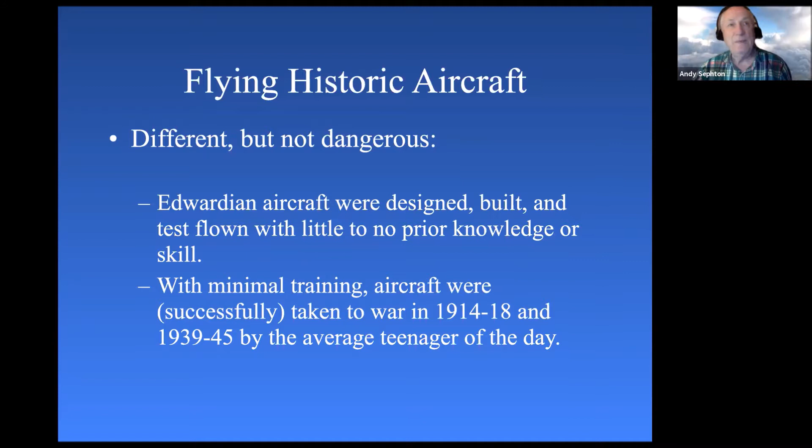With minimal training, aircraft was successfully taken to war by teenagers. And we've read the book, so we know that. So they can't be difficult, but they are sufficiently different from modern airplanes, not high risk, but you've got to unteach modern techniques and teach the old stuff. And that's really what my job at Shuttleworth was, making sure we'd got a set of pilots that could safely fly and demonstrate the airplanes.

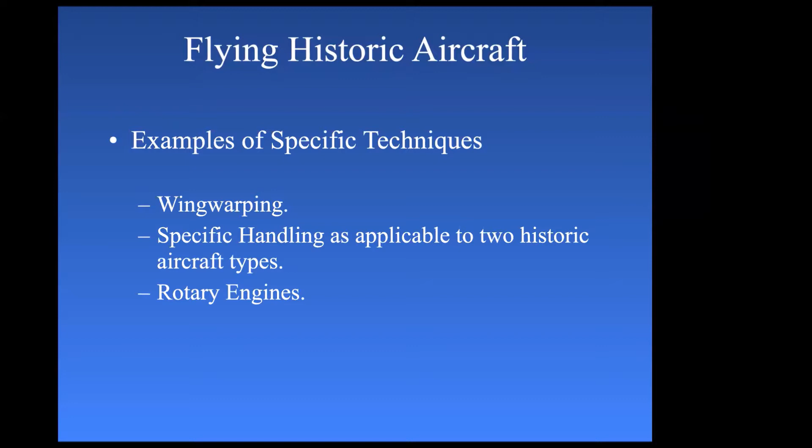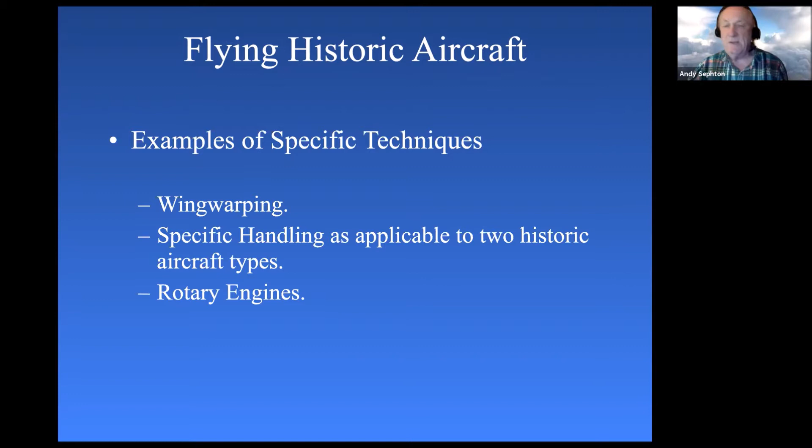So what I'm going to do today is look at examples of specific flying techniques that are applicable to some of the Shuttleworth airplanes. I won't go through every airplane because it would take too long, but we'll look at four particular handling types that are perhaps different to what the normal LAA pilot would be used to.

So wing warping, that was the description of it that I got from my predecessor as chief pilot at Shuttleworth: it'll never replace the aileron. Reason being that you get an awful lot of adverse yaw, and we can look at it with the Blériot 11. That's the Blériot 11.

Lost my headset because I trod on the cord. Let me just put that to the back of my computer.

Right, that's the Blériot 11. It's the oldest flying aeroplane in the world. Old Rhinebeck in the States thought they had the oldest one, but our construction number was slightly lower than theirs, so they've admitted that this is the oldest one.

It's a little bit like the Trigger's broom, though, in that it's had 5 new handles and 6 new heads, but it's the same old broom as it always was. The engine, I think, is still original, but a lot of the other stuff has been, shall we say, changed over the years. But it's still got the same construction number.

Now, looking at the flying of the airplane, the yaw is controlled by rudder bar, rudder at the back. The elevation is controlled by an elevator. And again, you've got elevators at the back of the airplane. But the roll control, as you would understand it, is done by wing warping. What happens when you wing warp? Let's see what the next slide is.

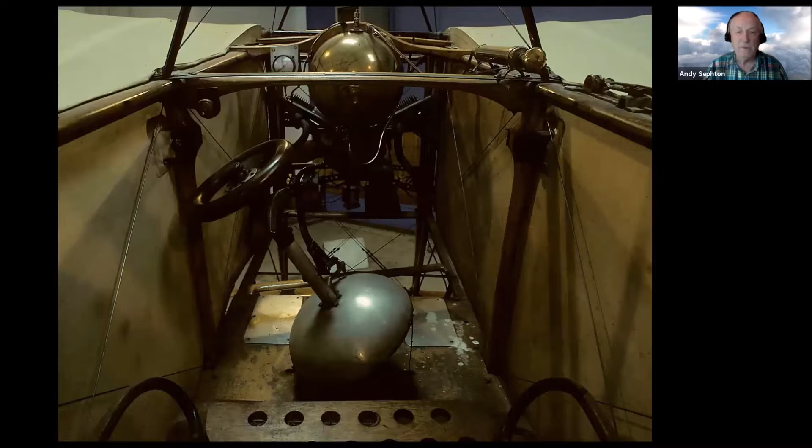That's the cockpit, and you've got a control column in the middle. At the bottom, that bell-shaped thing is called la cloche, which is French for bell, spookily enough. There's a bell crank under that with wires leading to the elevators and, correction, the wing warping. And there's a rudder bar just in front of the cloche that you can see. So it's conventional flying controls.

To operate the airplane, we might as well have a word on that now. The only gauge that you can see is to the left of the tank at the front, which is an oil pressure gauge. The oil pressure is pilot controlled, and you control it by pumping up the pressure in the oil tank, which is that pump on the right hand side of the cockpit. And on the top of the oil tank, that copper thing in the front of the airplane is a valve to blow off air, and at the bottom is another valve to allow oil to flow to the engine.

On the control column, there's a lever to the right of the control column, which is the advance and retard. Fully forward to go slow and fully back to go fast, which is opposite to the way you would normally expect it. And in fact, the French, up until World War II, all of their throttles operated in the reverse sense. You pulled it back to go faster and you pushed it forward to go slow. And the Hurricanes that we sent to France at the beginning of World War II were modified so that their throttles operated in the opposite direction.

Sometime during World War II, the French came into line with everybody else and have their throttles operating conventionally. And that is the only example I can ever find. And I lived in France for a year doing the French test pilot course. The only example I could find of the French coming into line with the rest of the world. So store that one away.

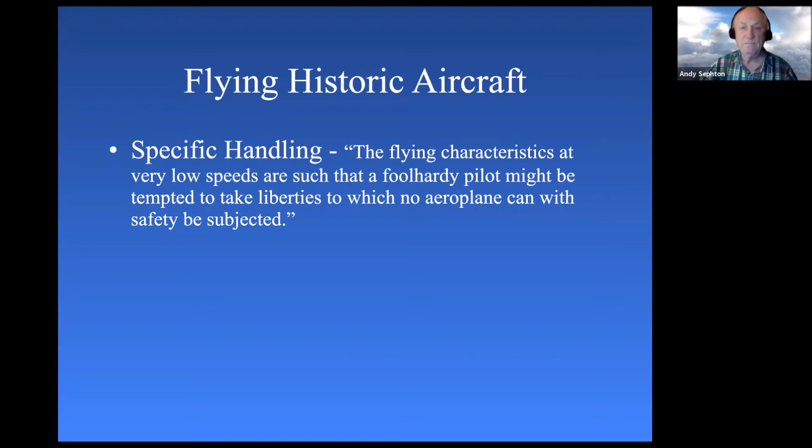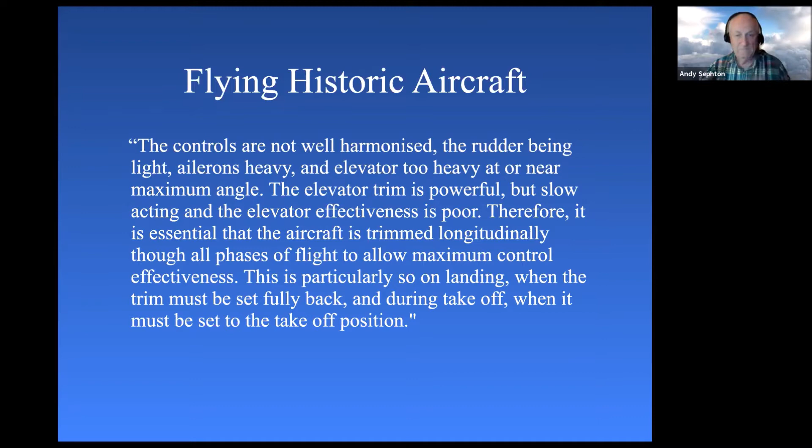Oh, yeah. I guess it's the Lysander because of the elevator trim. I was going to ask that at the end. I'm sorry. That's all right. But you're absolutely right. It is the Lysander.

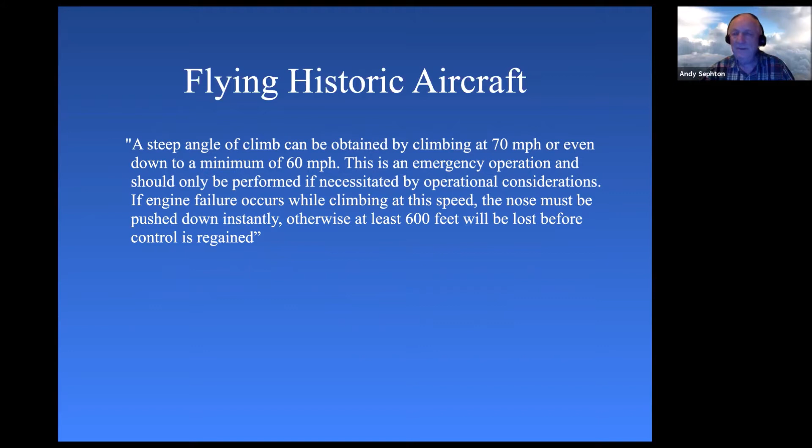Are we done? Yep, good. Thank you. And there we go, Westland Lysander. So why is it like that? The Lysander is one of my favorite airplanes. Second favorite, it's not first favorite, obviously.

It's a remarkable airplane. I gave this talk to Westlands 20 years ago now, and I said the Lysander is a remarkable airplane. Some of it's remarkably good, some of it's remarkably bad, but there's very little in between. And I got a very funny look from the chap at the back, who was one of the design team from 1930 on the airplane. So you've got to know your audience, really.

Let's look at the bad things. Really, it's the handling characteristics. The handling characteristics are not dangerous and they're not bad, but they are quite a trick, and I'll talk about that in a minute.

But the good stuff: if you look at the pilot's eyes, they're level with the wing, so you've got a good field of view. It's not cockpit visibility, it's cockpit field of view. Visibility is the distance you can see. Field of view is what you can see. So there's a good field of view in the Lysander. You're on the wing chord line in effect, so you can see above or below the wing. So you've got a good field of view to the rear.

The pilot sits quite high, so you can see over the nose. It's one of the few tail draggers that you don't have to weave, because you can see in front of the airplane. And because it's a relatively narrow cockpit, you can see either side as well. So very good field of view from the cockpit. What else is good?

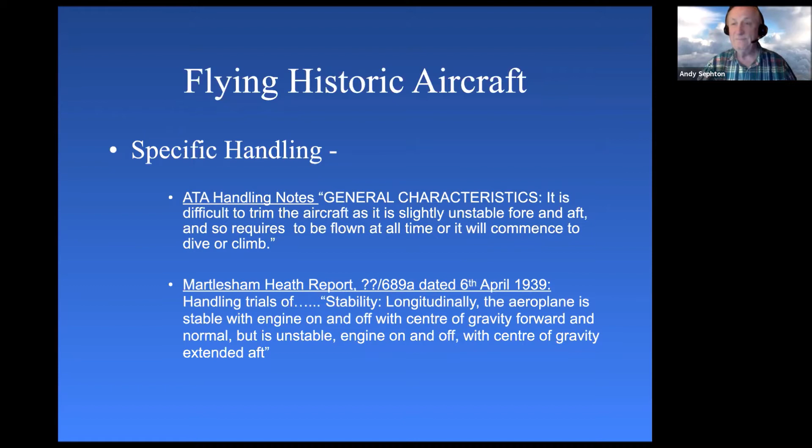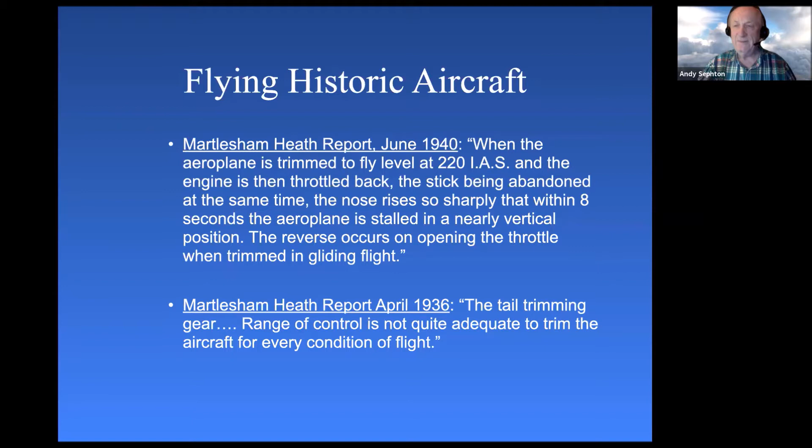All red? There's a few more. Any ideas what it is yet? Now, this is what the pilot's notes say. Having read all those Martlesham Heath experimental reports, this is what the pilot's notes say, and it is an absolute lie. It's not. It's the Hurricane Mark 1. Not my favorite airplane for various reasons, but it is unstable in pitch.

We thought we'd got something wrong with the airplane. In fact, I did the first flight of the Shuttleworth Sea Hurricane in 1995, and it was grossly unstable in pitch. We'd screwed up the center of gravity, and it was about 100% behind the aft limit. But even when we got it within the correct limits, it's still unstable in pitch, and we were trying to find out why. This was the only Hurricane 1 on the circuit at the time.

And I was working for Rolls-Royce, went to a dinner with Bill Pegg, who was the Brabazon test pilot, and asked him. I said, have you got any experience of Hurricanes and Spitfires? And he said, yes. What about testing? Yes, he had. So I said, well, what about Hurricane stability? And he looked down his nose at me and he said, everybody knows that the Spitfire gets its maneuverability from aerodynamics. The Hurricane gets it from instability, which was true. So it is an aircraft that's unstable in pitch.

So why is it unstable? Tailplane's too small. CG's too far aft. The tailplane actually is very small. The wing section on the Hurricane is the Clark YH, which has got quite a strong pitching moment. With the small tailplane, it is unstable in pitch, and even more so if you put a bit of yaw on, you blank one side of the tailplane, and you end up with quite violent pitch down.

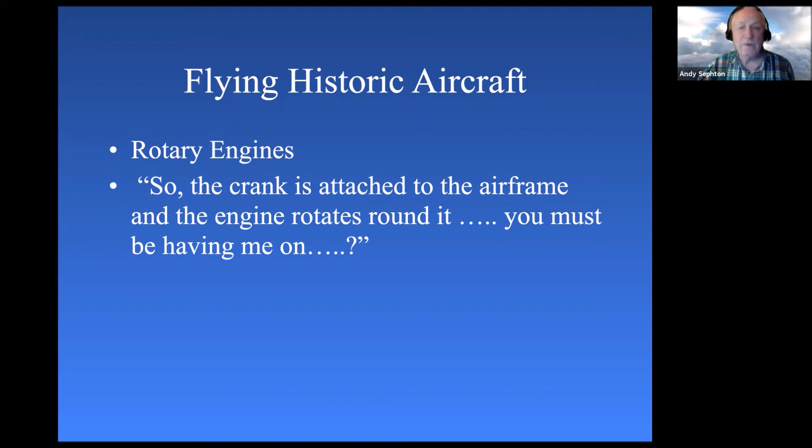Right, I'm going to go now on to rotaries, which is one of my favourite areas. We'll do this for about 20 minutes, then we'll go on to questions. So the rotary engined aircraft, as far as the pilot is concerned, is the Shuttleworth Collection Sopwith Pup. I'll tell you a little story about this.

I was in the Air Force. I was on 54 Squadron from 1975 through 1978. We were flying Jaguars. We had our 60th anniversary in 1976. We had obviously a weekend of celebrations.

The original squadron boss, a Major KK Horn, and his adjutant Captain Charlie came to our 60th anniversary celebrations. They formed the squadron in France on Sopwith Pups in 1916. We also had a lot of the First World War ground crew there as well. A lot of Second World War people too.

Bill Hooper, who was the creator of Pilot Officer Prune, was a member of 54 Squadron. Pollock, the guy that flew the Hunter under Tower Bridge, was a member of 54 as well, so we got to meet him. But going back to KK Horn, Captain Charlie was a little guy. He was about 95 at the time when we met him, and probably about 5'2", 5'3", a little chap with a shock of white hair, a bit like mine. Well, if you could see mine, you'd see it was white.

And he gave the speech after dinner. He gave three anecdotes, and unfortunately I can only remember one of them. He said, and I quote, "In retrospect, it was probably a silly thing to do. But in my defense, it was after a particularly drunken night in the mess, and I did win the bet. I do believe I am the only person ever to fly a Sopwith Pup stark naked over the Western Front," which we all thought was absolutely fabulous.

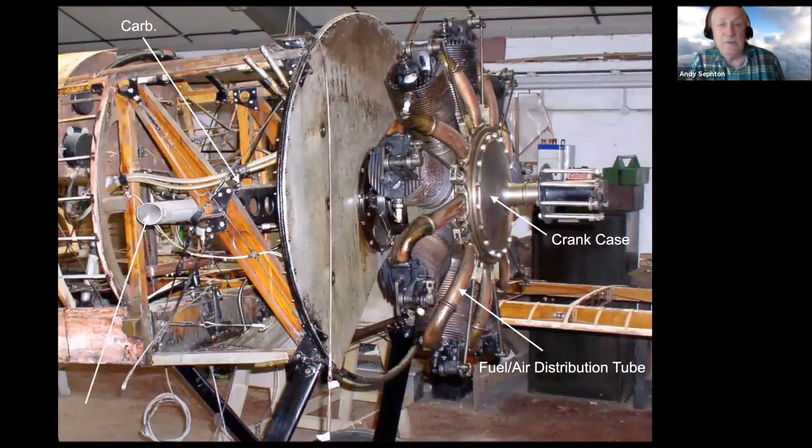Anyway, the Sopwith Pup has a rotary engine. This is the fuselage of the Shuttleworth Collection's Pup. The crankshaft is attached to the fuselage, and the engine rotates around it. On the right-hand side of the picture, you'll see the word crank. That is pointing really to the back of the engine, not to the front. In the middle of the picture, you should see an arrow going to the air intake, that tube sticking out of the right-hand side of the airplane, but the left-hand side of the picture.

The carburettor is a T-piece in the middle of the aircraft where those intake tubes meet the tube that runs to the middle of the aircraft through the hollow crankshaft. The fuel-air mixture is collected in the center of the engine, and then it goes up the fuel-air distribution pipes to the inlet valves, and you can see the pipes, those brass curly things on the front, and the fuel is taken into the cylinders and then fired as normal.

So, characteristics. This is the Sopwith Pup petrol system. It's pressurized. There's no venturi in a rotary engine carburettor, so there's no suction. So you have to pressurize the fuel tank, and it's done with a Rotheram propeller pump, which is a pressure pump, or a hand pump. There's a relief valve, there's a pressure gauge so the pilot can monitor it, and the pilot can control the relief valve so that it doesn't overpressure.

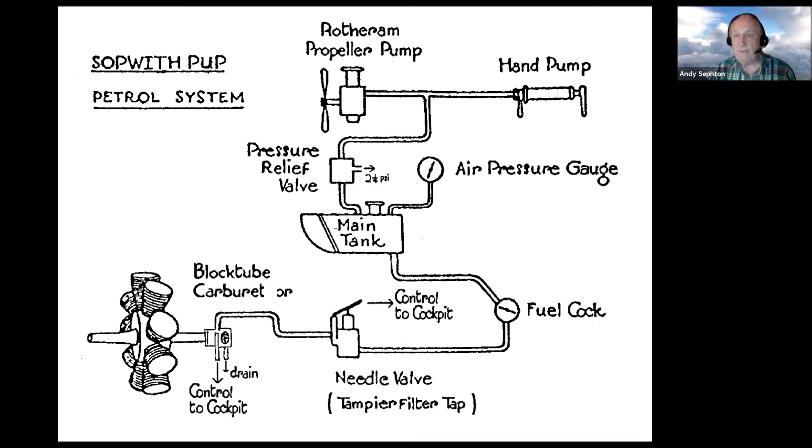There's a fuel cock, which then takes the fuel to two levers that the pilot controls. One is the needle valve or Tampier filter tap or fuel-air lever; it's called one of those three things. The other one is the fuel control, which is at the carburettor end, if you look on the left-hand side. The Tampier filter tap controls the fuel-air mixture going to the engine, and the fuel control controls the fuel going to the fuel-air mixture. That then goes to the engine and it runs.

Well, the intention was to fly the aircraft using the rudder to turn it and use the control column in roll to balance the turn, whereas we would use the control column and use the rudder to balance. So it's a bit, I was going to say arse about face, but I shouldn't really.

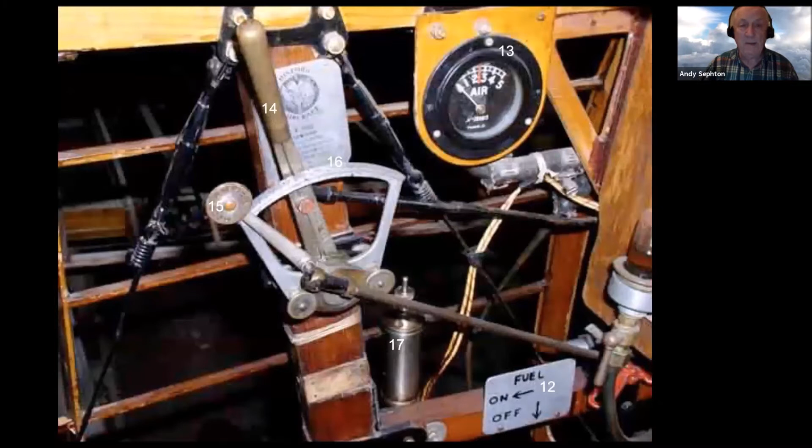Pilot controls, he has 2 levers. Number 14 is the fuel air lever. That controls the amount of fuel and air going to the engine. Number 15 is the fuel lever, which controls the amount of fuel that's going into the fuel air system.

They go in a quadrant that's marked from 1 to 10. You can't see the marks on there, unfortunately, but you'll see an indicator on the point of lever number 14, the fuel air lever, that is pointing to the quadrant so that you can note the position of the lever at any time and note it down. Going to the right of that, you see the air pressure gauge is redlined at 2.5. So if it goes above 2.5, then you need to turn the air down a little bit.

Needle valve is attached to a slab of metal that moves across and either opens or closes the intake area. And that's why it's called a block tube, because you're blocking the tube. And as that lump of metal moves across, it either opens or closes the air inlet, but at the same time, the needle valve increases or decreases the fuel flow. So that's why it's called a fuel air lever, because it controls the amount of fuel and air.

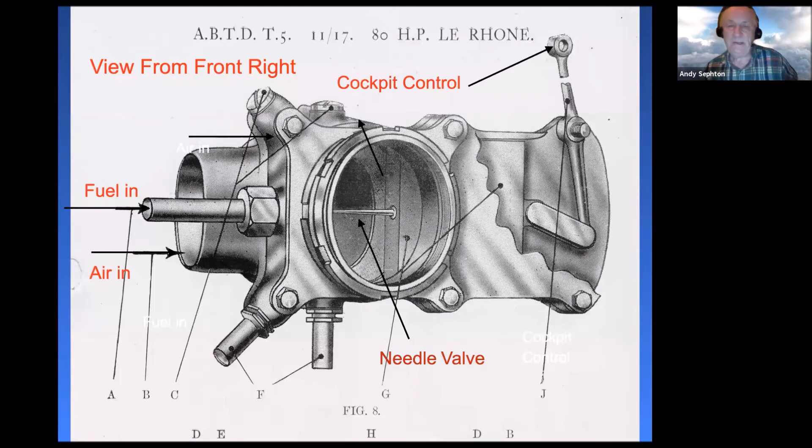The amount of fuel that goes in, if you go to the left-hand side, it's got fuel in. The amount of fuel that goes into that area is controlled by the little lever. So if you turn the little lever off, there's no way you'll get any fuel air going to the engine. If you pull the little lever fully forward, you'll get far too much fuel going into the engine. But because you've got this needle valve and the block tube, you've got a little bit of modulation of engine power using the tall lever.

Looking at it from above, then you can see the air intakes going across the cockpit, across the top of the picture, where it says air in. In front of that, you've got the block tube, which is the lump of metal that goes across that blocks it off or opens it up, and the fuel coming in from the left-hand side. And at the bottom, the fuel air mixture going to the engine.

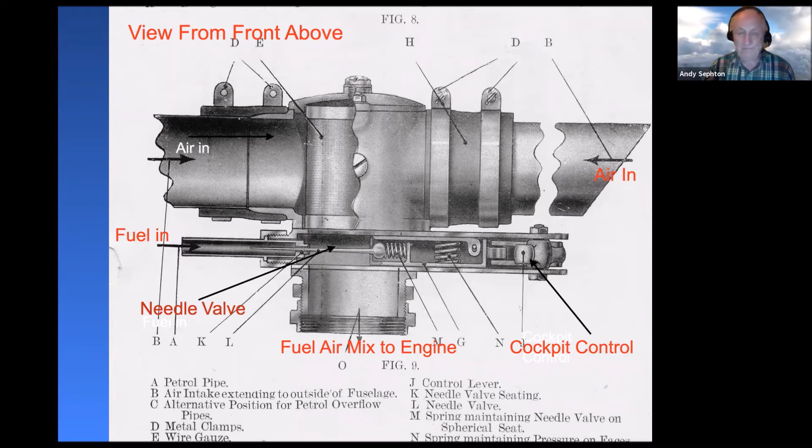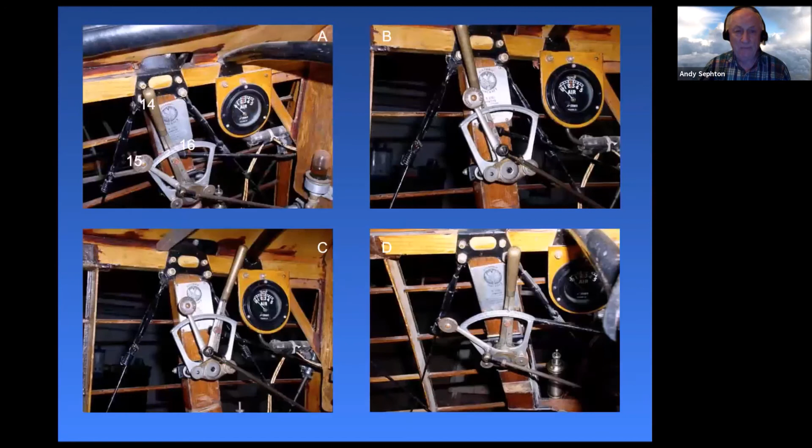How do we run the engine? So looking at diagram A, top left, we set the fuel lever to 0 and we set the block tube lever number 14 to a position for roughly 800 RPM running. The ground crew will prime each cylinder in turn, spin the prop a few times to distribute the mixture, call contact, pilot calls contact, turns the ignition on.

The ground crew then spin the propeller, the engine will fire up and it will burn off the prime and then it'll stop. So it'll make a noise, and then it'll just coast. Before the engine stops rotating, you move lever 15 forward so it's in position B to introduce fuel into the engine. You then modulate the lever B to get smooth running.

If you go too far forward, you put too much fuel in, the engine will stop. If you're in the air, it will take 30 seconds to clear. If you're on the ground, you've got to blow it all out and start again. If you move the lever too far lean, the engine will stop. But if you're on the ground and you move it forward quickly, you can often get the engine back again. And if you're in the air, same thing.

You warm up the engine for about 30 seconds around 800 RPM. Rotaries will overheat on the ground. You shouldn't run them for more than about 2.5 to 3 minutes. So you have to be relatively quick getting the lever positions. You then move the block tube forward, the tall one, as in C, to the fast running position. And I'll show you in a minute that that will cause the engine to stop. You then bring the little one forward to get the right fuel.

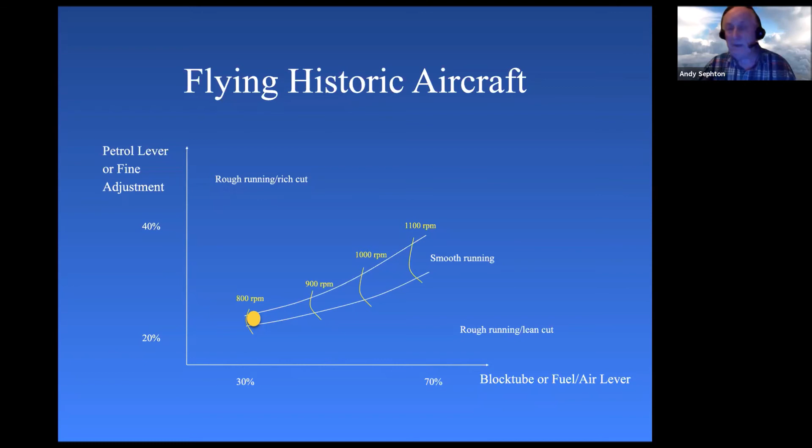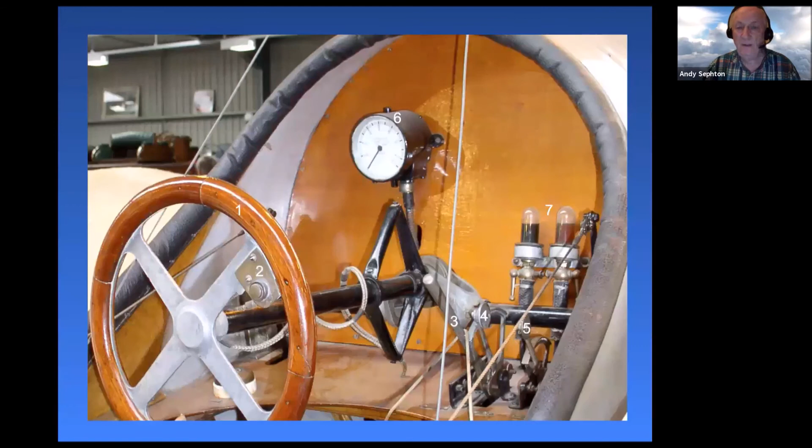This is my favorite rotary powered airplane. Absolutely delightful. It's the only Shuttleworth Collection airplane that is stable about all three axes. All of the other aircraft are unstable around at least one axis. And this is the oldest flying British airplane. There we go. I'm going to leave that because it's not relevant.